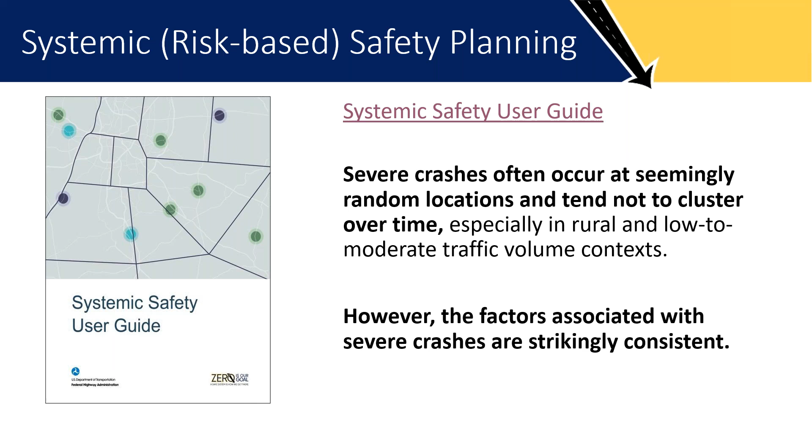I do want to mention the safe system approach. I'm not going to go into detail on this. Hopefully you've heard of the safe system approach, and it is kind of the basis for everything that USDOT is doing for safety. But the most critical element for what we're going to talk about today is that safety needs to be proactive. And so these risk-based methods do help you to make those improvements, oftentimes in locations where the crash hasn't happened yet, but you have the right recipe. You have all the elements there that one day likely will cause that serious crash to occur.

The timing of this discussion is no coincidence. As Jamie already mentioned, the 2025 Tribal Transportation Program Safety Fund is currently accepting applications until January 15th of 2025. And I don't want to go into a lot of detail, but again, that's available right now for you to apply for. And there are 4 different categories in the TTP Safety Fund. Most critical to our discussion today is the data assessment, improvement, and analysis category.

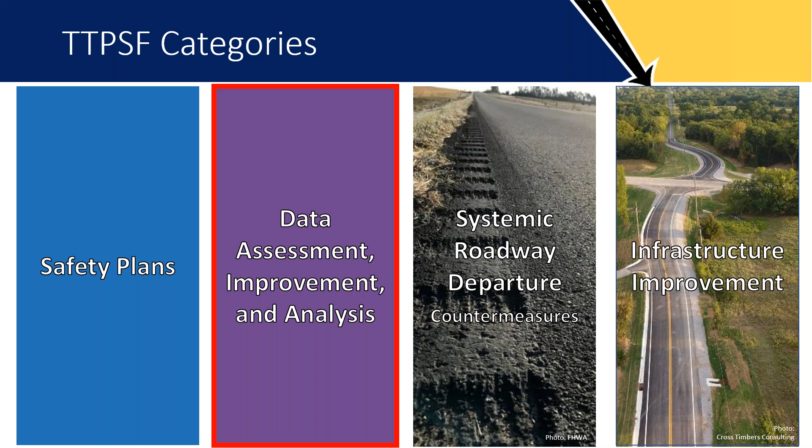And the examples that you're about to see are types of work that could be eligible as a data analysis project. And so each of these speakers will be sharing about their product, the type of analysis that they offer that is systemic safety related, as well as North Dakota State University is going to be talking about a project that they are currently doing with the Roadway Safety Foundation that is also a risk-based approach to safety.

To keep myself out of hot water, I'll just say the U.S. government doesn't endorse any companies, products, methods, or manufacturers, but the types of methods that you're about to see are related to some of those methods that we do promote, the systemic method specifically. So with that, I'll hand it back over to Jamie, and we'll get on with the show.

Perfect. Thank you so much, Adam. And our next speaker is going to be Steve Abley. Steve is a professional engineer, founder, and chief executive of Abley. The firm is a strong supporter of the Safe System approach and a trusted advisor to many governments and agencies of government. Abley extends its technical reach through the Abley Safe System suite of products, including Safe Curves, which will now be what we discuss.

Thanks very much, Jamie. Is that on screen? It is. It looks great. Thank you very much. Well, look, thanks very much, and hi everyone. I'm Steve Abley, and I'm very proud to be able to share a little bit about Abley today and Safe Curves.

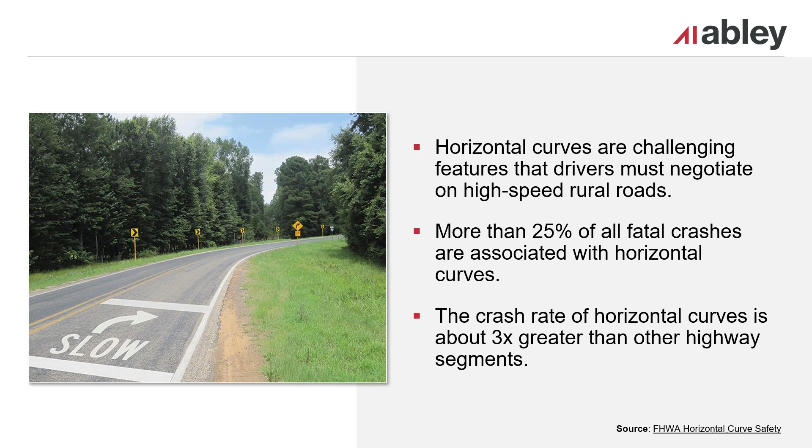So given rural curves are a focus area, and as a road safety professional, you need to answer 3 key questions when addressing horizontal curves. 1, where are these curves and which ones are high risk curves? 2, which curves, or better described groups of curves, are more important than others? And 3, what real-world countermeasures can be done to remove or minimize the risk of a rural roadway departure that will likely result in death or serious injury?

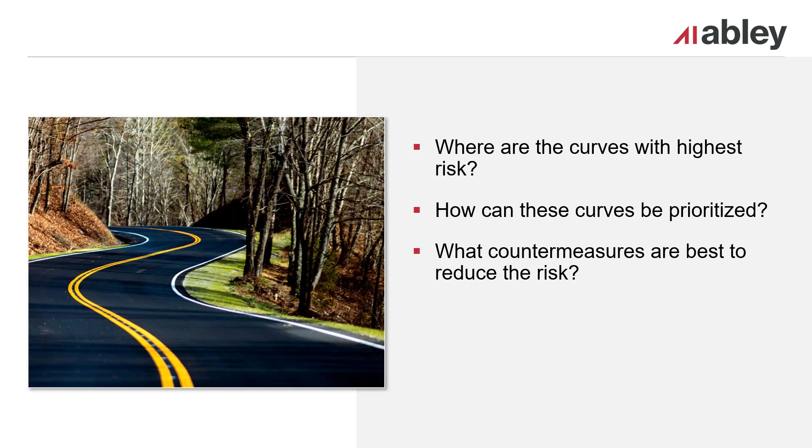Well, traditionally, as Adam explained that safety issues with horizontal curves were detected by looking at crash data to identify black spots. This is particularly problematic on low volume roads where crashes tend to be more sporadic and more difficult to predict, often referred to as whack-a-mole. The systemic approach is championed by FHWA, and the example in the middle is a style of systemic analysis using reactive crash data.

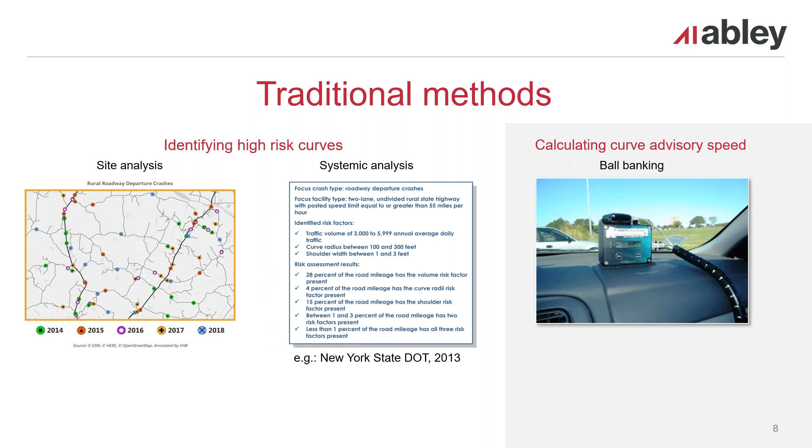One of the easiest and most cost-effective countermeasures for horizontal curves is warning the driver of an impending risk. That includes signs and assessing curve advisory speeds. The picture on the right is a digital side thrust indicator, and this, or alternatively an analog ball bank indicator, is one way to do that, but it is also pretty labor intensive, involving driving the curve multiple times in both directions. This then raises the question, is there a better way? And leads nicely into describing what is Safe Curves.

Safe Curves has three modules. The first is identify, that identifies high risk curves. This is done for every curve and in both directions. The second is prioritize, that prioritizes corridors for safety improvements. This aggregates individual curve risk into corridors so that you can provide corridor treatments that enable a consistent driver experience. And the third is interventions, that specifies MUTCD compliant signage, including the location, type, and grouping of curve signs, and it also provides curve advisory speed plaque recommendations.

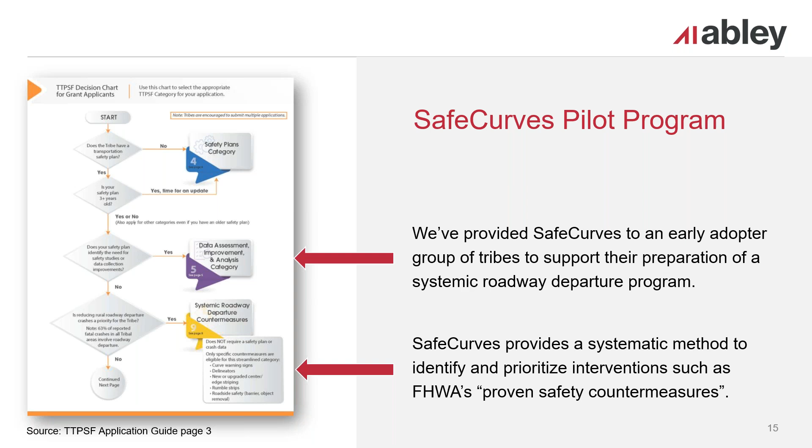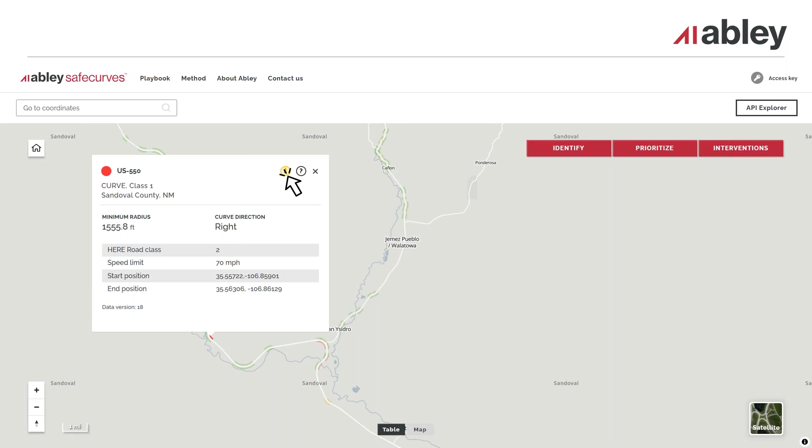Here you can see I've selected one of the class 1 curves and a pop-up is displayed that tells me the curve details, including curve class, in this case curve class 1, its radii, its start and end position in decimal lat long, and the speed limit. This yellow icon provides a link that goes through to Google Street View. I'll select that now. And up pops a new browser window taking me directly to the curve being assessed. So if you need to, you can visually identify or verify the infrastructure on the curve.

I'll return to the Safe Curves app and select the next module, Prioritize. What happens next is a drop-down box shows the different prioritization categories. It's at this stage that individual curve risk is combined with risk exposure, i.e. traffic flow, but all those calculations are done for you behind the scenes. What is important to note is that priority 1 is higher than priority 2, and so on. We're particularly interested in priority 1 and priority 2 corridors that together only represent a quarter of the network length, but together they hold over half of the network risk.

So if I click select all, the network is shown and the curves have been aggregated into homogeneous driver experience corridors. These are then prioritized based on risk and exposure. If I select the corridor, a pop-up display is showing the priority number and location.

Finally, the third module is interventions. The drop-down box shows the various MUTCD horizontal alignment sign categories along with the corresponding advisory speed if a curve advisory plaque is specified. Again, when I select all, the signs are shown and the coloured border surrounding the sign reflects if the MUTCD specifies the sign is required, it's red, recommended, it's amber, or optional, it's green. I've highlighted a location that shows a curve with 2 required signs in red, and I'm going to zoom into those signs now.

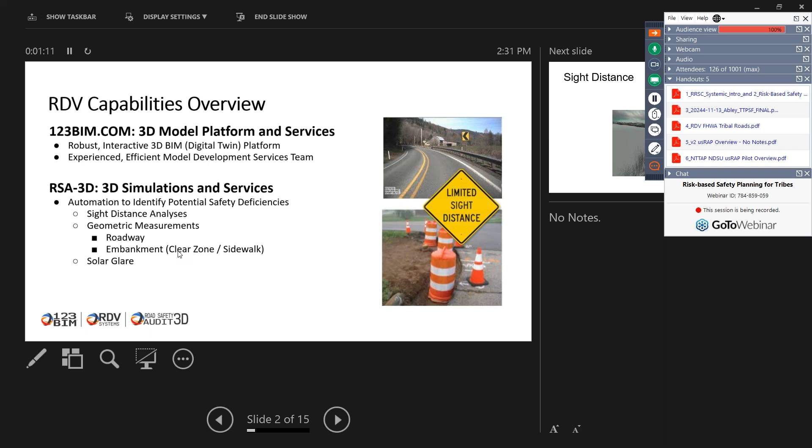We're using a lot of AI and automation to identify potential safety deficiencies by actually using that 3D model. In our case, we use a LiDAR point cloud to do several different analyses: sight distance analysis, the geometric measurements of the roadway and the embankment, and even working in solar glare and how that may play into any kind of safety characteristics.

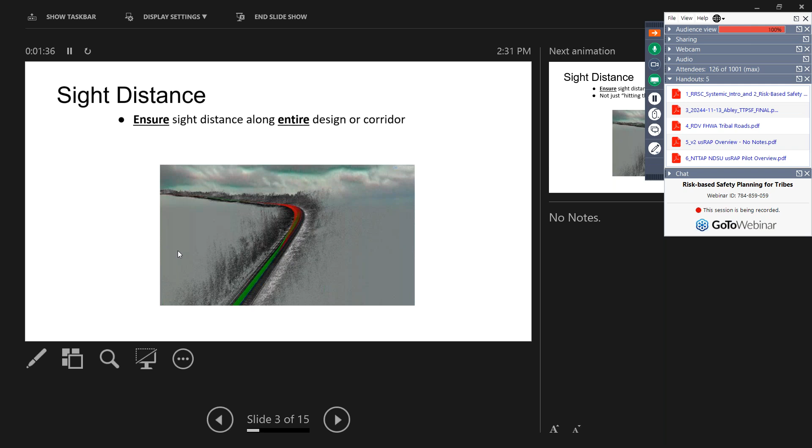But before we start, the Green Book has been around for a long time, and in a 2D context, we were using it to do these calculations. But really, the spirit of the Green Book guidelines is to ensure sight distance along the entire design or the corridor. It's not just about hitting the numbers; the goal is to achieve sight distance. So as we think about this, what an elegant way to do this by putting it in a 3D context.

So I'm going to play this video, and this is a point cloud from one of our customers. The first thing we'll do is bring in that 3D model. From there, we'll then digitize the road lanes. And then we start working our way through the environment in 10-foot intervals and asking the question, can I see the object that I'm supposed to be able to see?

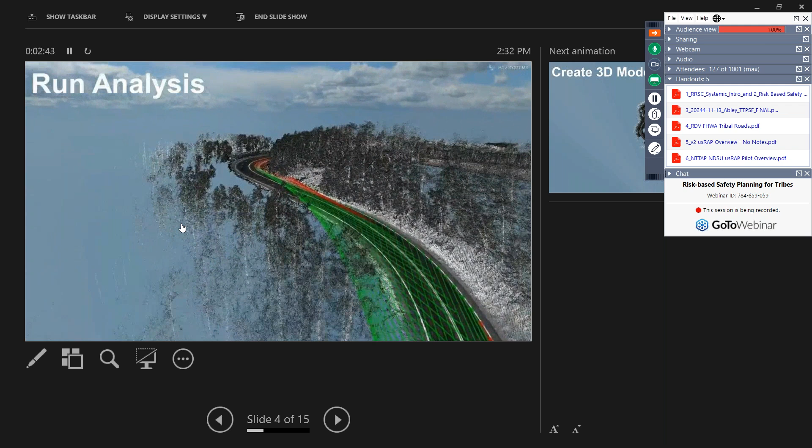That red ball out there represents the 2-foot object for the stopping sight distance paradigm. We look through the entire environment looking for that object and capture all of those measurements. So in essence, we're drawing sight lines through an entire corridor to understand where we can see and where we can't. So the same application can be used for different paradigms.

In this case, we're going to see intersection sight distance. This was in Pennsylvania. We're going to fly into this environment. They wanted 10-foot setbacks instead of the 14-foot that the Green Book calls for. So we put the driver's eye at that 10-foot setback, and we're now looking for that 3.5-foot object coming through the environment.

And really, from a bird's eye perspective, here's what's happening. That very furthest point is where the sight triangle should start, but in the end, the object is not visible until you see the green aspects of that. So in a nutshell, roughly half of the sight triangle is not visible at this particular intersection.

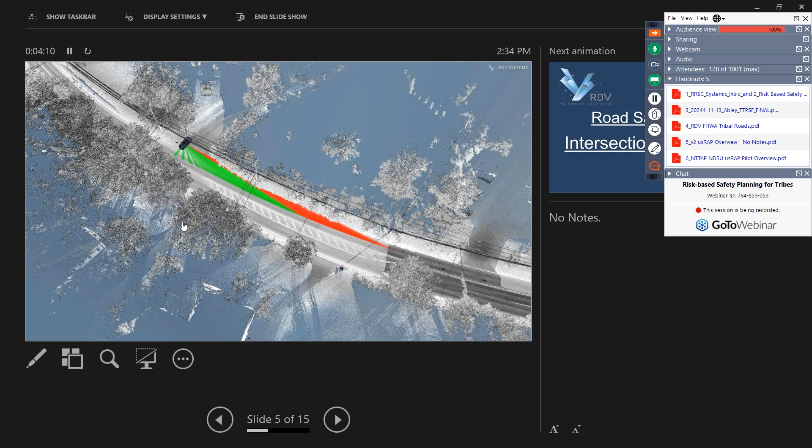Lastly, we can then use this exact same type of thinking on the passing sight distance paradigm. You see us looking for that 3.5-foot object in the opposite lane. There are different methodologies to check the striping currently, but a lot of times what we're doing is taking 2 cars following each other in the same lane using GPS. In this particular case, we're able to simulate it in the opposing lane using all of the AASHTO Green Book calculations.

Now, it's important to note here, any of those variables can be manipulated in our analyses. A lot of times we'll start with the Green Book tables as our starting point for whichever paradigm we're analyzing. However, we can plug in MUTCD, we can look at 85th percentile speeds, we can change the eye height. If you know there's a lot of tractor trailer traffic, for example, we can move that eye height from the typical 3.5-foot to, let's say, 6-foot.

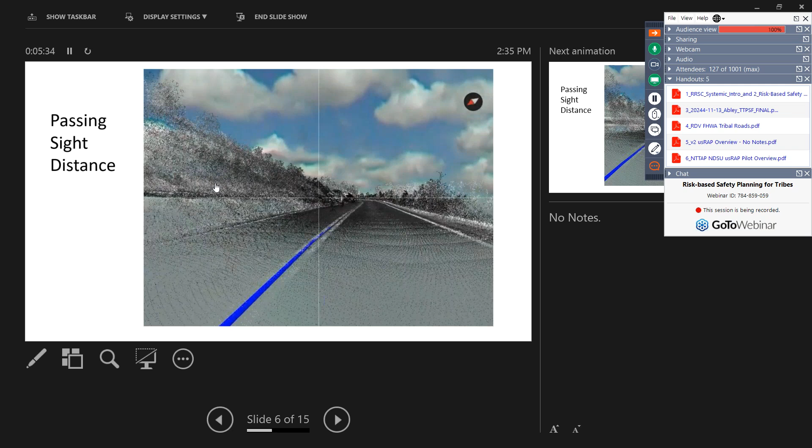Really, because we're in this simulated sandbox here, we can change those variables, get you the results for 2 different approaches, and then you can look for the deltas in between. The point is that we're really trying to encourage the ability to measure and experiment with different real world scenarios.

So in addition, we're taking that LiDAR point cloud and doing something similar to what we just watched. We're looking for the horizontal curves as well and doing a virtual ball bank using that LiDAR point cloud and all the measurements of the radius and those types of things. But in addition, we can look for pavement widths, shoulder widths, flat spot detection, which is essentially looking for that gradient calculation. We can do embankment characteristic studies.

We're engaged with a state currently where they're asking themselves, is this embankment recoverable or non-recoverable? If it's non-recoverable, do we have guardrail there? And we're employing a lot of AI. They gave us the exact slope counts that they wanted us to use, and we were then able to take that and analyze over 100 miles at scale as a starting point to say, here are the slope results, and there are several areas where you don't have guardrail.

At that point, the DOT will then decide, should we do earthwork and make this a recoverable slope, or should we add that guardrail inventory? Similarly, another state that we're working with has asked us to do clear zone studies using this type of analysis as well.

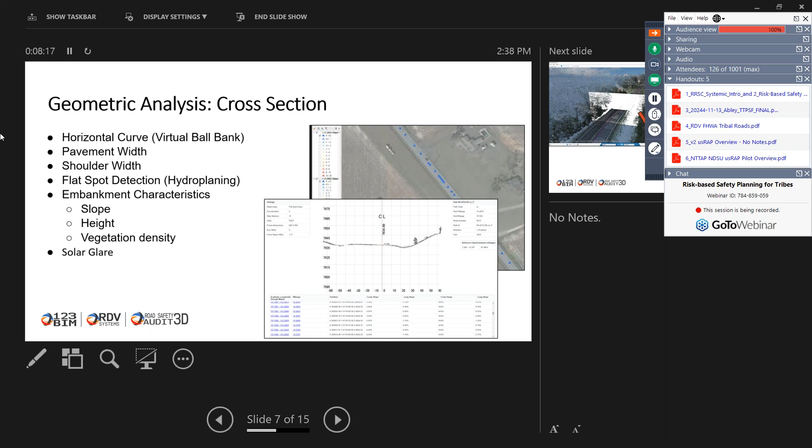Much like Steve, you'll see in that table below, we lat long everything so that you can go check Google Maps as well. So everything is tied back to latitude and longitude, and therefore we're able to pinpoint those locations so that you can use other tool sets out there to analyze the environment or verify or double check the environment from your desktop.

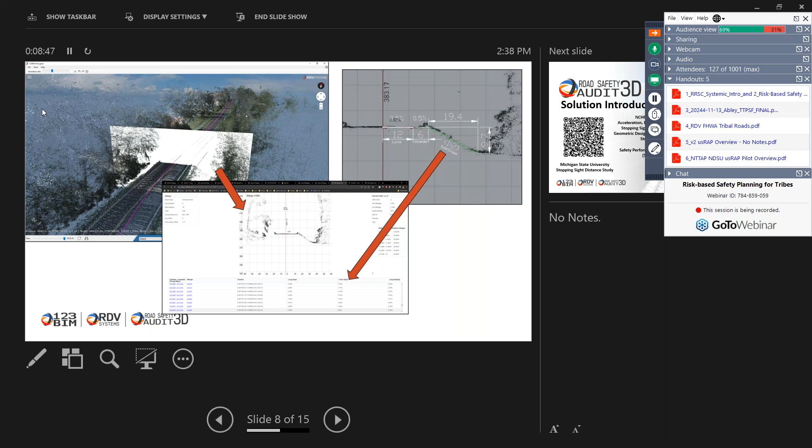So as we talk about that cross-sectional analysis, looking for those clear zone aspects or slopes, we can take that information, put it back into our reporting system, but ultimately then you can get all the measurements out of that for your benefit in terms of trying to understand exactly what's happening in the environment and what safety countermeasures you might employ.

One interesting thing is we partnered with Utah DOT and Michigan State University on an NCHRP study, and that NCHRP study actually created a safety performance function for stopping sight distance. First time it's ever really been quantified in this aspect, but that SPF factor of, is it more likely for a crash in a particular area? That's all out there. The QR code is here. You can actually go take a look at that.

Dr. Pete Savolainen and his team, as well as UDOT, did a fantastic job, and we were honored to be part of that study. Pretty exciting stuff. We're moving on to intersection and passing zone aspects as well, and hoping shortly here that we'll have safety performance functions for those as well.

Most recently, we've been working with KLJ and Adam on a particular segment in Montana. It's Montana 212 in the Northern Cheyenne tribal area. I took a couple of these screenshots. This is literally hot off the press. We just got done. I just saw the results of the analysis today. So in that top picture each dot represents a 10-foot interval, and all the calculations that go with it you can see in the tabular report.

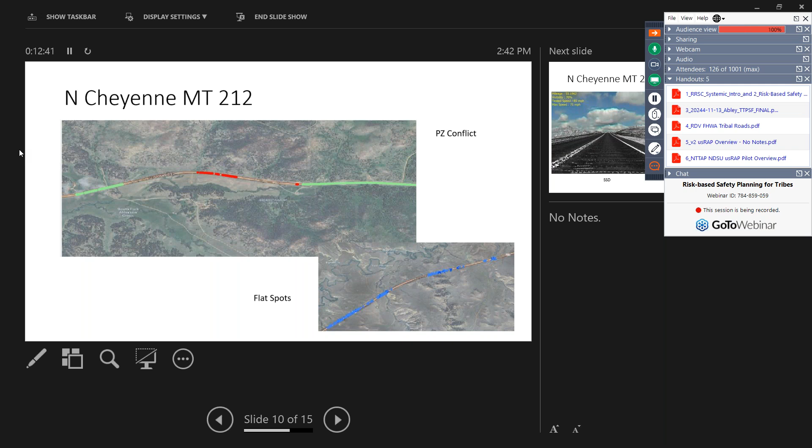And so generally speaking, how this is being leveraged is when the rehab cycle comes up, they make sure that the contractor or the consultant that has been selected to help with that rehab project is aware of where some of these areas are, and they can make the corrections when they're milling and filling. So really a productive way, another aspect of safety to look at these roadways.

Here are a couple video clips of... there it goes. This is actually from the LiDAR point cloud. We're looking for the two-foot object on the left-hand side for stopping sight distance. And that's actually from the 212 study that we just did.

And then likewise, we have a passing zone aspect where we're looking for that 3.5-foot object out here at the correct distance. We're going at 65 miles an hour, and then use the tables to understand how well we can see it. I realize it's roughly 1,200 feet out there, so to see that 3.5-foot object is difficult unless we have a zoom feature that you can look at.

But as we're looking at that MP4 video, you see the visibility percentage up there, and what that constitutes is the number of pixels that are part of that 3.5-foot object. Thankfully, the computer can see it and knows how visible it is. So anyway, both just new examples of putting the technology to use.

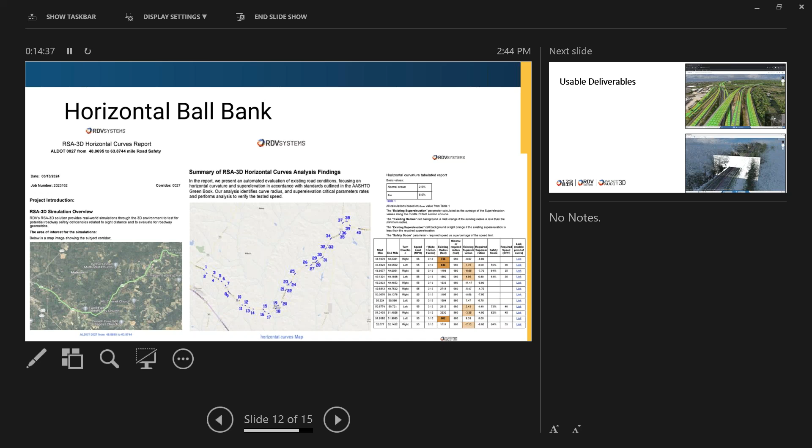Once again, though, you can change these variables. We can use whatever numbers and crowning and friction factors and those types of things that you want us to use that are applicable for your particular scenario.

So from a deliverable standpoint, we have a summary of findings report that kind of gives the highlights. You didn't have time to watch the entire sporting event, but you did tune into ESPN to look at the highlights, and that's what that summary of findings report is, to help with prioritization, but also to call your attention to some of the biggest offenders in the environment.

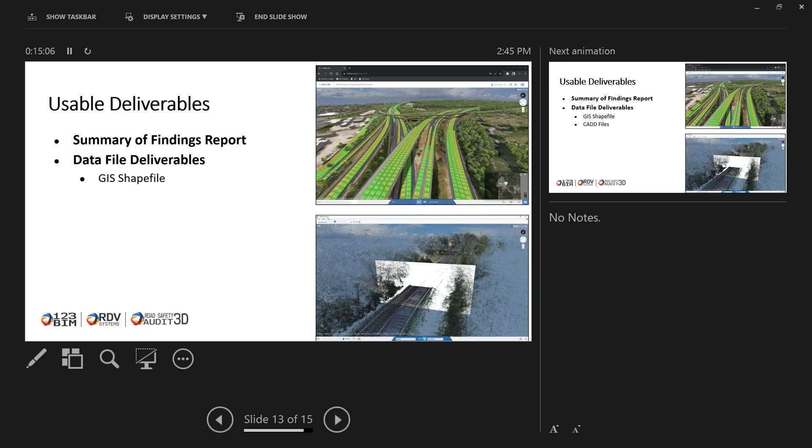We deliver shapefiles so that you can put this in your GIS database and use other data sources such as crash data or other traffic volumes. You know, a lot of organizations have a lot of different GIS capabilities, and so this just becomes another data point that they can compare with some of the other data they have. We can output CAD files when we do the same kind of analyses on proposed designs.

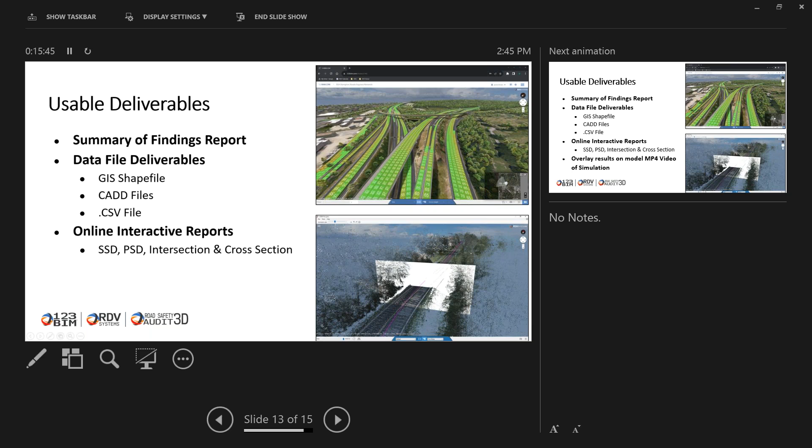It also has a CSV file. If you're a person that really doesn't like GIS that much, but want all the hard data numbers, the CSV file will have all of that. And then we have our online interactive reports, as well as we create an MP4 video of every simulation that we do, whether it's intersection, passing zone, stopping sight distance. All of them have their own MP4 videos.

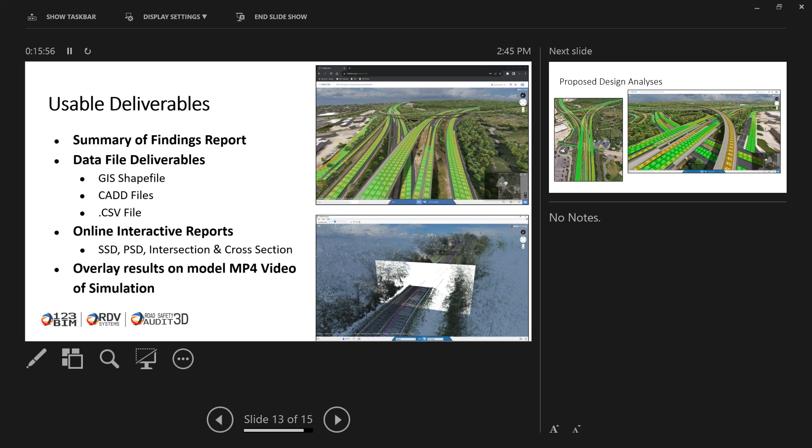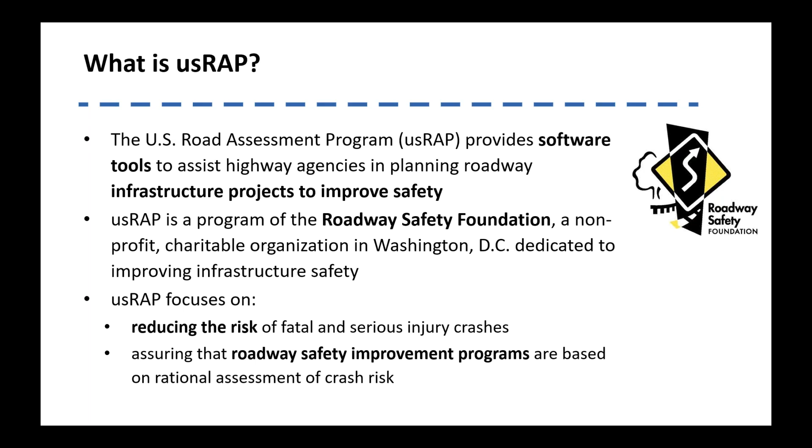USRAP is a systemic approach. As Adam talked about, it looks at proactively improving the network that has the highest potential for crash reduction. You don't have to wait for crashes to happen. It looks at the network as a whole. It focuses on the long-term improvement needs and not simply the traditional hotspot analysis where you're looking at maybe short-term crash patterns. So this provides a benefit of, again, being proactive and systemic in assessing where your needs are and what kind of countermeasures can be applied.

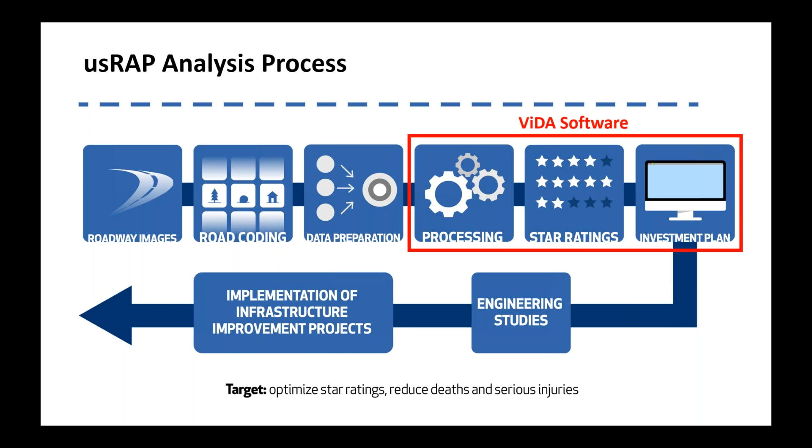You'll see some common themes throughout this. I might repeat a few times, but I wanted to give an overview of VIDA and the star rating process, as well as the Safer Road Investment Plan. But regarding the VIDA software, it allows the upload of this coded roadway data. It processes that data. It will display the data on screen. The results can be downloaded.

A key element is it does not require site-specific crash data. So if an agency does not have great crash data or crash locations, general network-wide data is useful simply for calibration of the model to those local conditions. So just in general, knowing how many fatal and serious injury crashes have occurred throughout the roadway network that's being assessed can be utilized in VIDA.

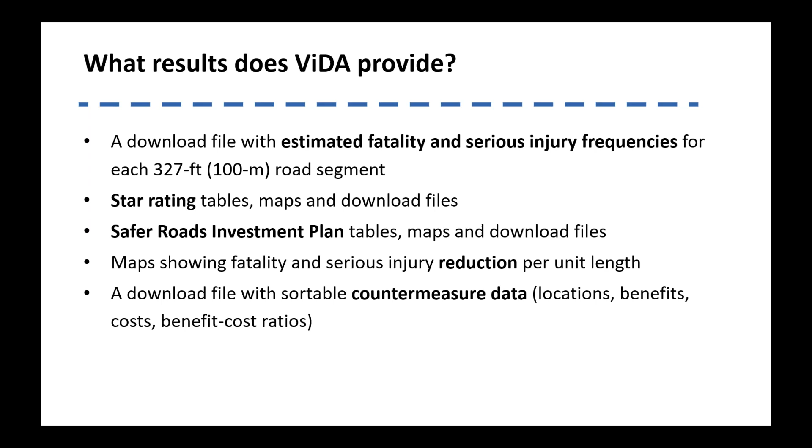So transitioning into the next step, thinking about how the star ratings are defined in the VIDA software. They're really based on the presence or absence of different roadway characteristics and traffic control features, traffic flow, the network. There are over 50 that are defined at the roadway level at 100-meter segments, as I said. Really, the star ratings are the first step to considering the safety performance of the roadway. So much like star ratings for vehicles, there are star ratings for roads. A 1-star road has the fewest safety features, and a 5-star road has the most safety features. Speed does have a great impact on that.

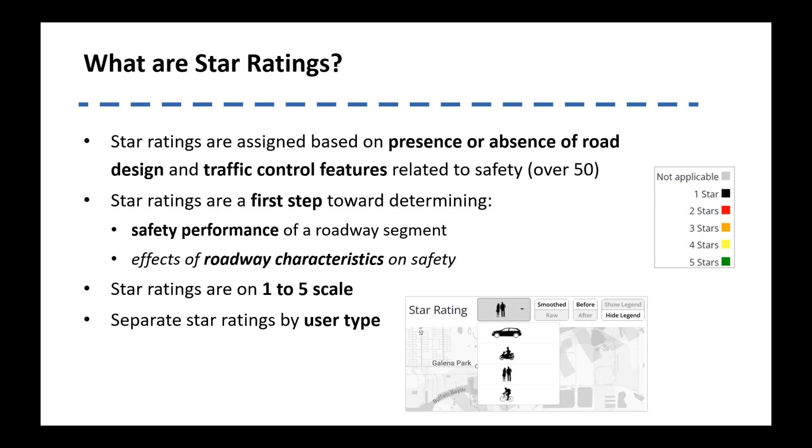So a benefit of the star rating is you can also see how different roadway characteristics have an impact on safety, and I will touch on that through a demonstrator aspect within the VIDA software. As I mentioned, star ratings are on a 1 to 5 scale, and star ratings are provided for different user groups. So for vehicle occupants, for motorcyclists or other motorized two-wheelers, for vulnerable road users such as peds and bikes as well, we have different star ratings for each one of those user types throughout your network.

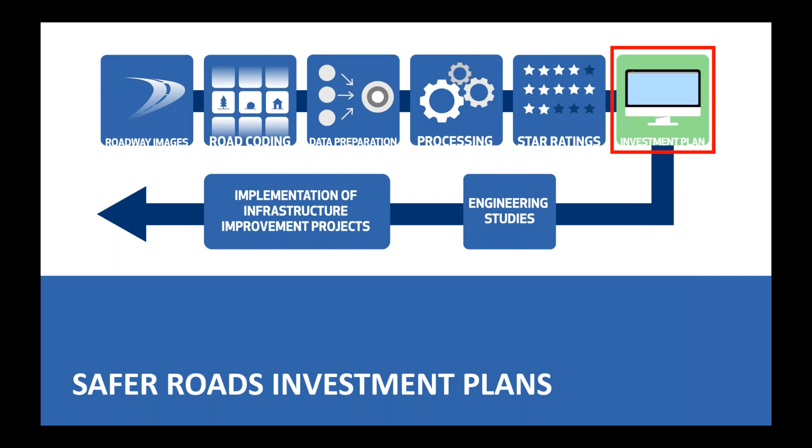And a really key element of this is getting to this investment plan, thinking about that risk component based on what characteristics exist in the network, how you can improve your network and reduce the fatal and serious injury crashes. So the investment plan identifies, again, those specific improvements at specific locations throughout the network based on the characteristics that exist currently in the network.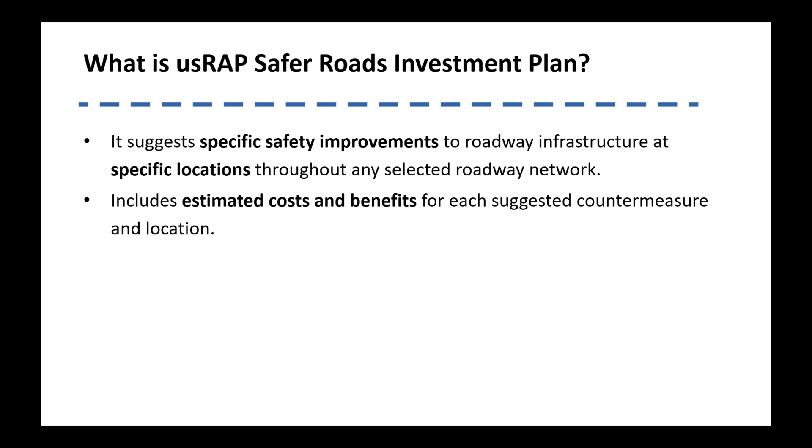And then it provides an estimated cost and benefits for each one of those countermeasures that have been selected based on the parameters that you defined, the maximum or minimum benefit cost ratio, the cost that you have for estimates for each one of the type of countermeasures being considered.

The investment plans, again, are based on these roadway characteristics and roadside characteristics and flow characteristics that have been coded at 100-meter segments. There are more than 90 different countermeasures that are considered and over 300 different engineering trigger sets for consideration for these different countermeasures at different locations throughout the roadway network.

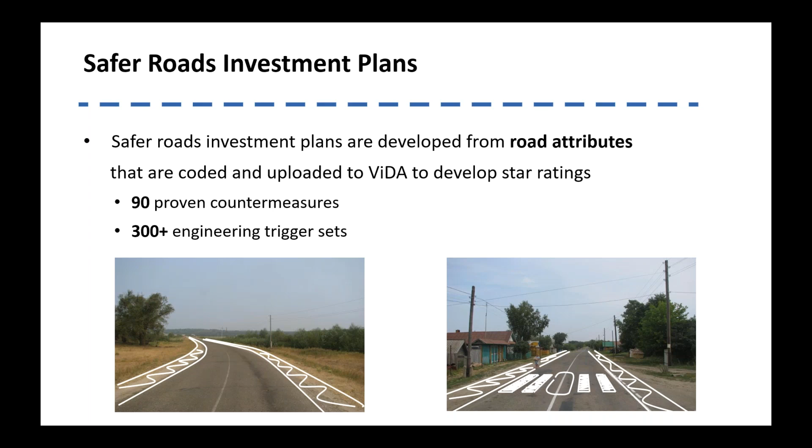Anyone can really benefit from use of a Safer Road Investment Plan because it helps you prioritize where these infrastructure improvements can best improve safety, reduce your fatal and serious injury crashes. And again, without very detailed crash data, just broad crash data for the network that you're analyzing as a whole.

So what the user will get out of a Safer Road Investment Plan will be where sites can be improved, what type of countermeasures can be applied, and there can be multiple countermeasures at individual locations, the cost of those countermeasures, what the anticipated benefits are, specifically with respect to savings in fatalities and serious injuries. And again, that kind of goes back to some of those cost estimates that you provided for societal costs for those type of injuries.

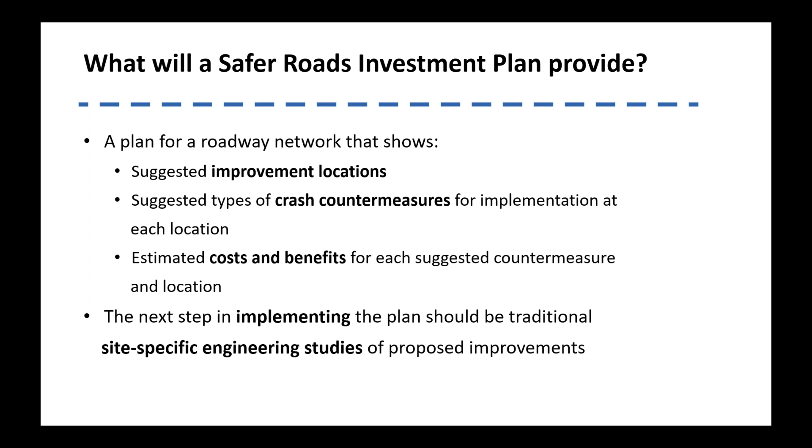And then ultimately, this information then can be used to implement kind of these more traditional site-specific engineering studies. So this is a planning level assessment suggesting locations where improvements may be beneficial that then can go into more detailed analysis to define what your implementation plan will be.

Overall, as I touched on, USRAP can be applied for any roadway network. In any roadway, you can look at a single roadway, you can look at multiple roadways in the network. It does not replace engineering judgment and local expertise. There's a lot of areas where you can provide some of that local expertise with respect to what your anticipated peak hour flows are for peds and bikes, what your traffic volumes are, any kind of countermeasure costs, because those can change from different locations in the country.

It's a planning tool, it's not a design tool. So keep that in mind as it's part of the process to develop an actual implementation plan for safety improvements. It identifies cost-effective projects quickly based on your network and what kind of characteristics exist in the network. It's really potentially beneficial for locations without good crash data, without comprehensive crash data or site-specific crash data.

And also networks, a lot of these rural networks have very low traffic volumes. You're gonna have fatal and severe crashes, but they're gonna be spread throughout the network. So looking at this risk-based systemic approach, you're gonna target improvements on your network where you have the highest risk and a potential for these severe crashes.

FHWA has identified it as a data-driven safety approach, and it allows agencies to take actions now instead of waiting for crashes to happen. The traditional hotspot analysis is where you're looking at sites where multiple crashes have happened. But again, on these low volume networks, and even on higher volume networks, a lot of these serious crashes are kind of distributed throughout, and it's hard to target where you make these improvements.

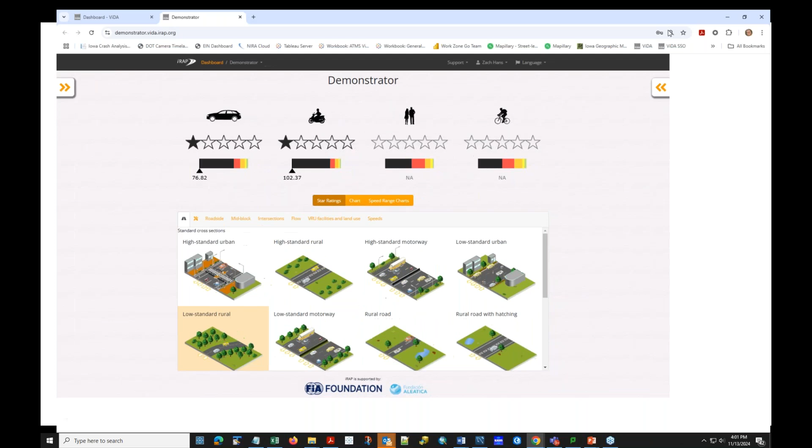So if I have a minute, I can show you quickly the demonstrator. Can you tell me, Jamie, can you see the demonstrator? I can see it, yes. All right, so thank you. So this, I had given a couple slides here.

So this gives a typical roadway section. So for example, if I made a simple change and say, change this from centerline rumble strips not present to a centerline rumble strip present, you'll be able to see some changes throughout the network. You'll see that it will give you warnings that it's unlikely if the delineation is considered poor.

So for example, delineation is one consideration. So as you go through, it will ask you, okay, consider my delineation adequate. And so now you can still see on this cross section of roadway, you did have a numerical increase or decrease in the risk, but you still were in that 1-star range.

You'll notice here that we do not have star ratings for the pedestrians and bicyclists. This is simply because we're looking at a rural environment. If we change that to an urban environment, if we look at a low standard urban environment, for example, it's going to show us, based on those characteristics for that environment, what the star ratings are for the vehicle occupants, motorcyclists, bikes, and peds.

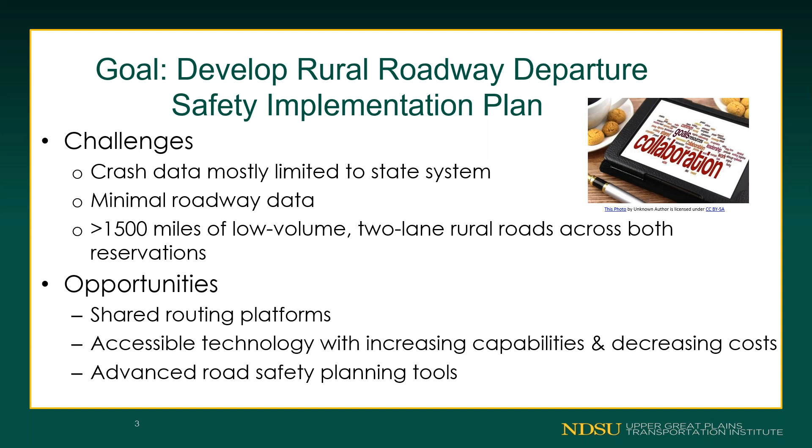So the pilot project that we're working on, our focus is to work with the local crew in the tribal road department. They are the eyes and ears. They're the ones who are going to be working on this issue. When we're talking about the BIA road system out in tribal lands, there's nobody else whose job it is, who has resources to do anything about it with regard to safety and crash reduction, except the tribe. And so if the tribe doesn't do anything about it, nothing's going to happen.

And so the impetus of this project is to work with the local staff, train them on how to use the cameras, manage the data at the local level, and then get it uploaded so that we could process it at North Dakota State University. And so that was basically the big scale workflow.

Adam helped us with some processing on the first stage to get it up into the Google Street View and Mapillary platforms, and then the data was shared with us. Our crew and Sherjad will go into more detail about the coding and how we worked with the data once we got it, and how it ties into the ViDA software package that was just described. Next slide, please.

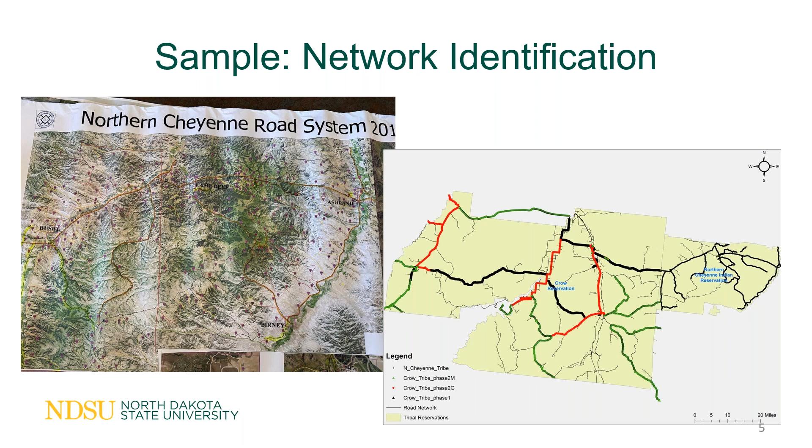And this is basically the process. We had the camera, a 360-degree camera with 2 lenses, and it's amazing the quality of the imagery that it can collect. It also has an internal GPS, and I believe it would also get an elevation, at least of the point of the camera. Otherwise, the imagery itself is flat. We don't have LiDAR type data that we can do real spatial analysis with, but it does capture a center line, and it does capture, I believe, an elevation of the camera.

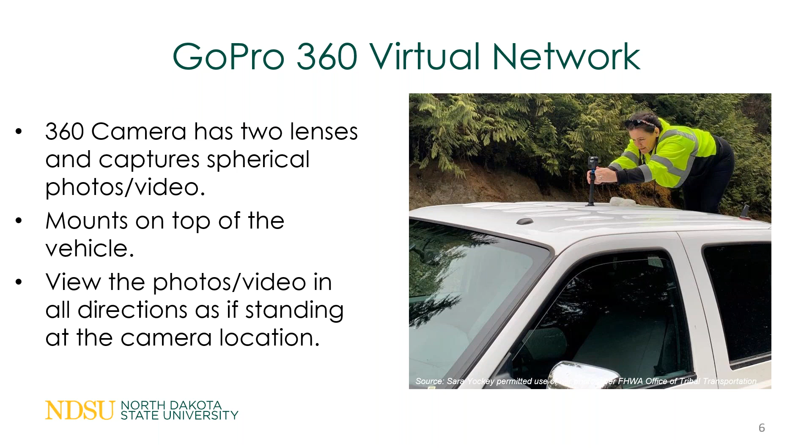And it gets mounted on the top of the vehicle. Keeping it mounted is sometimes an issue, depending on if your vehicle is aluminum; you can't use a magnet, so we need another way. We learned those lessons, and we're able to get the data collected. And so with the 360, you just drive one direction, and it collects both the front and the back view. So Sherjad, I'll turn it over to you to talk about what we did after we got the imagery.

Sure. Thank you, Ron, and thanks, Jamie, for the introduction. Can you see the full screen presentation? Yes. Looks okay, great. Perfect.

So as Ron just mentioned, we collect the images from those 360-degree cameras, and Adam helped us put those images into Google and Mapillary. Why have we uploaded those images to Google? Because we need to bring those images to the coders so that they can code those road sections, and the coders need to have it in a systematic manner. Uploading these images to online mapping services like Google Street View on the left, or another service like Mapillary, helps a lot in this case. Each platform has its own perks.

Google has a wide vision mode where you can move into different timelines of images, so you can move from 2023 images to 2015 images if available. Whereas Mapillary has a very active image scrolling option, so when the coders are coding, they can quickly move forward or backward on those images. However, both systems use coordinate-based mapping to stitch those images, and we actually leverage that system on ArcGIS.

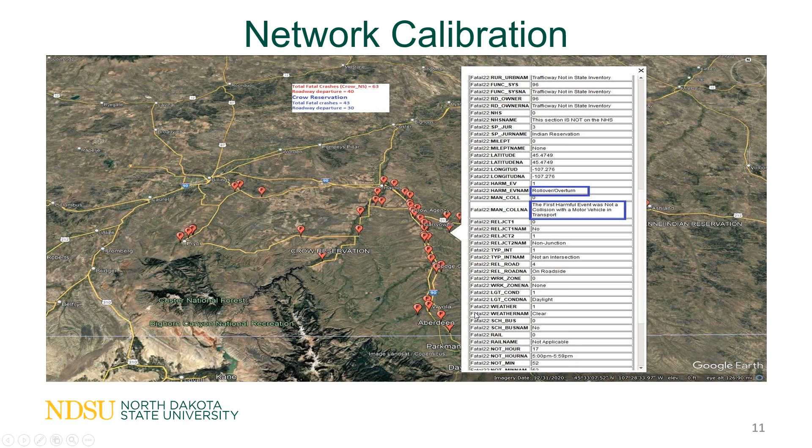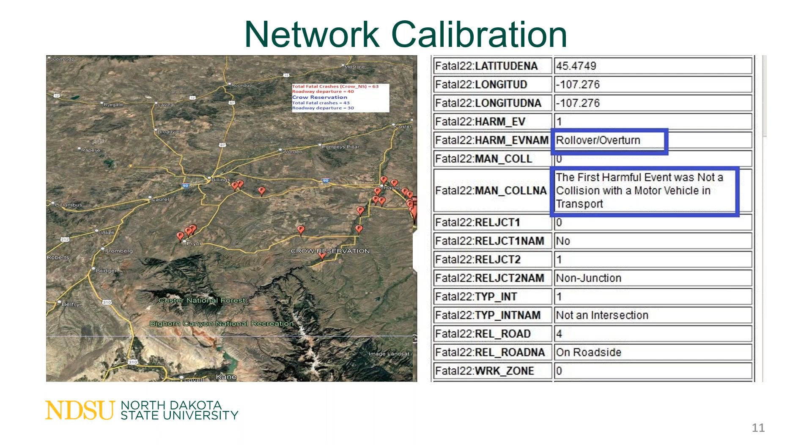What we did is we identified all the fatal crashes on ArcGIS, and because our project goal is developing a safety implementation plan against roadway departure, we identified those separately from the FARS data. I zoomed in a little so you can see we identified the rollover or overturn type crashes, and it came out that in the Crow Reservation area alone there are 30 roadway departure crashes out of 43 total crashes, whereas for the whole Crow and Northern Cheyenne area it's 40 roadway departure crashes out of 63.

Now, using this crash data, we can map all those crashes on the total network, and based on what our coders have coded and how the star ratings have been generated, those can be compiled into one map to see whether the location of these fatal crashes actually makes sense for the engineering study or not.

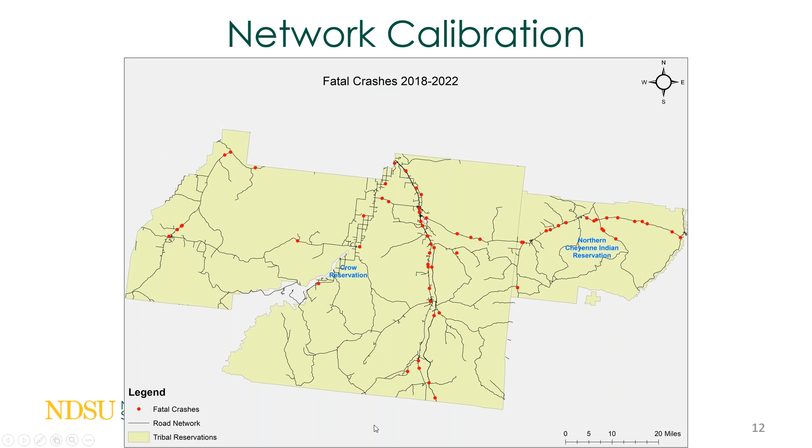And these star ratings are based on how the coders actually read the road, or the presence or absence of any design elements or traffic control features, and also traffic volume and the speed, and if there is crash data available for the whole network level calibration.

And that eventually will take the tribe to the safer road investment plan, which again Zach has already presented, and VIDA will assess each of these road sections for 70 specific countermeasures, I believe, and because it deals with the data from every 100-meter section, it can actually assign those measures for a specific length and location. And it will also perform a benefit cost analysis for every countermeasure for which a need is identified, as well as the analysis for the whole network.

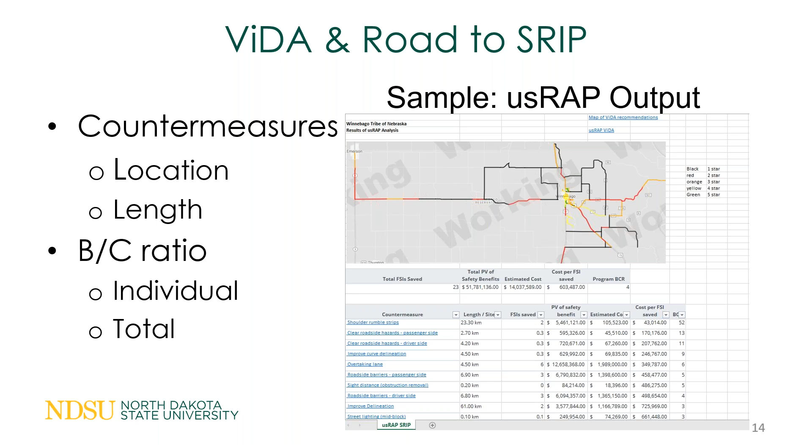Now, you can think of this as a connecting point of how the images taken from the road can go all the way up to VIDA. And there are some other uses of the 360 camera that have been reported. For example, the Cherokee Nation uses the 360 camera before each project to document the conditions. An example they gave us is it was useful to address citizen complaints about a mailbox being removed but not replaced during the construction.

Also, it can be used to size up maintenance projects so that the appropriate materials can be gathered before mobilizing for a repair, or even monitoring the contractor progress and project details.